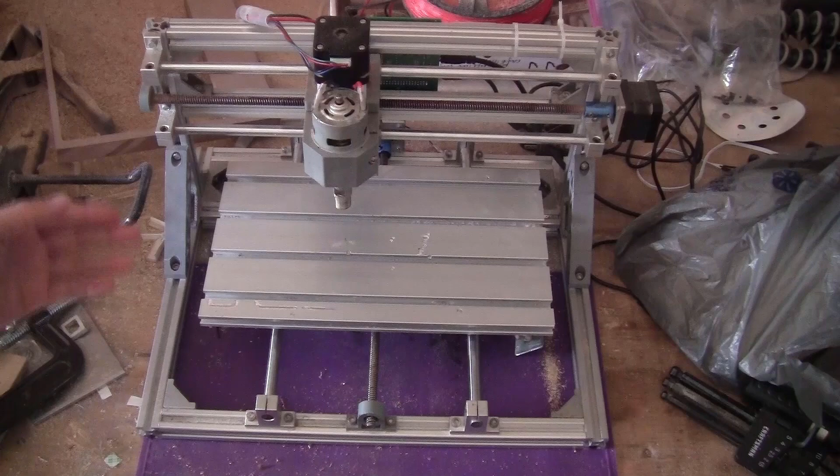Today I got a request from one of the viewers to make a video about the spoil board or waste board, whatever you call it, on this 3018 CNC machine, and I think that makes sense because look at what happened to me here.

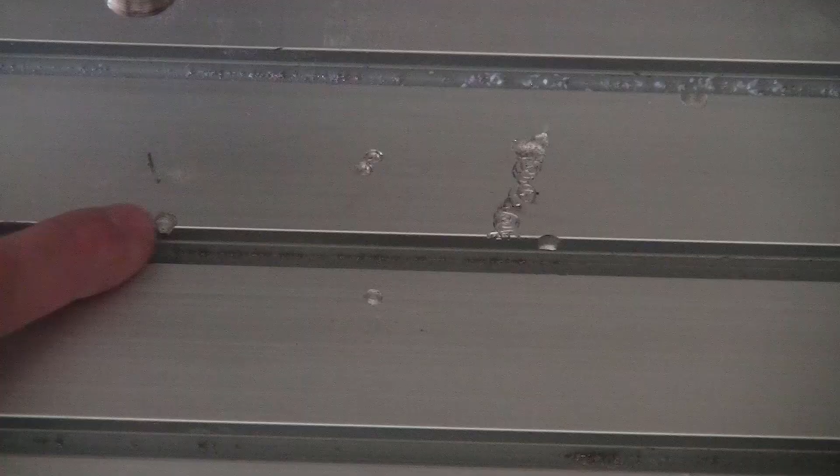From time to time, I have the bit go a bit too deep, and it cuts into the platform like this, and two bad things happen: it damages the platform, and it can also break your bit, so you definitely don't want this. So I think the request makes sense.

Okay guys, so first of all, you probably don't want to stack another board on top of this one, because you'll reduce the working range in the z-axis, and this machine is already very limited in z-axis range. So what I'm going to do is replace this platform with one I'm going to design and make, and I don't want to dismount the whole machine.

I only want to take this one out, unscrew all the bolts underneath, put the new one on, and then put a waste board on top of that. That waste board you can replace very easily every time you think there's too much damage on it. So let me show you the design I made on the computer.

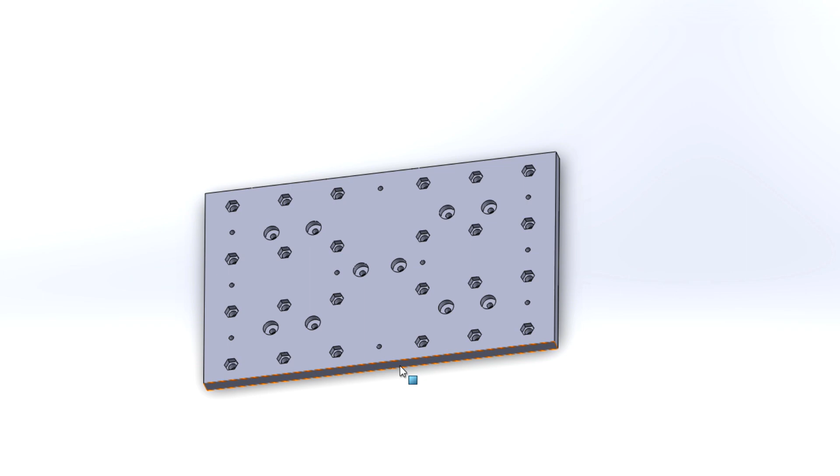Here's my design for the waste board. It has two parts, the bottom plate and the top plate. You can see the bottom plate is a lot more complicated, it has more holes and pockets that need to be machined.

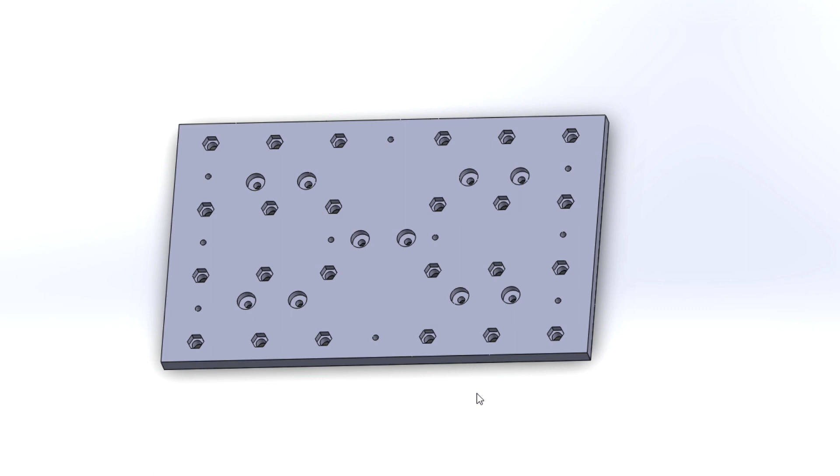The way I designed it, you can machine all this using just your 3018 CNC machine. Well, of course, you might need a saw to cut out this plate. So let me switch to Fusion 360 and show you quickly the CAM part for this one. The top plate is even easier, you just follow all the same steps, but there's less to do.

Okay, here in Fusion 360 you just click on File, open the step file I already saved, the bottom plate. Now click on Manufacture and create a stock for it. So I choose reference point, this one, and here I just put 0 and 0.

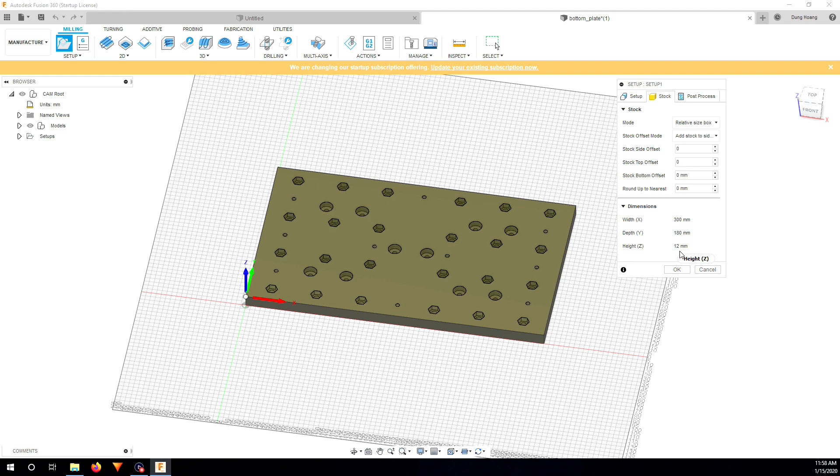Okay, so here you can see the dimension is exactly the dimension of the platform on your 3018 CNC, and the thickness here is 12 millimeters because I have plywood of half-inch thick, so it's about 12 millimeters. Now I just click OK.

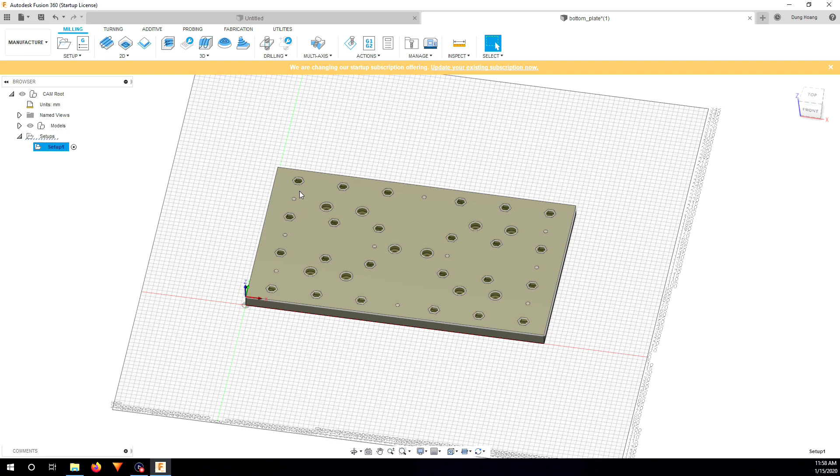For the milling part, I'm just going to use one bit, a 4mm flat end mill, because all the holes here are equal or bigger than 4mm. So first of all, I'm going to drill all the 4mm holes, which will be faster than milling. So click on drill and select, and I choose the 4mm flat end mill.

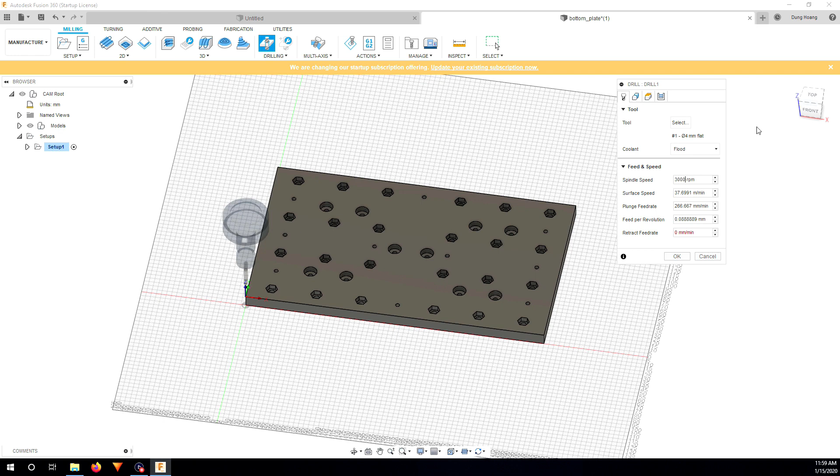Okay, here because it's drilling, I just go very slow, I don't need it to be fast. It's going to kind of burn the wood, so I'll put 3000 rpm, that should be fine. And for retract rate here, just increase it probably to 200.

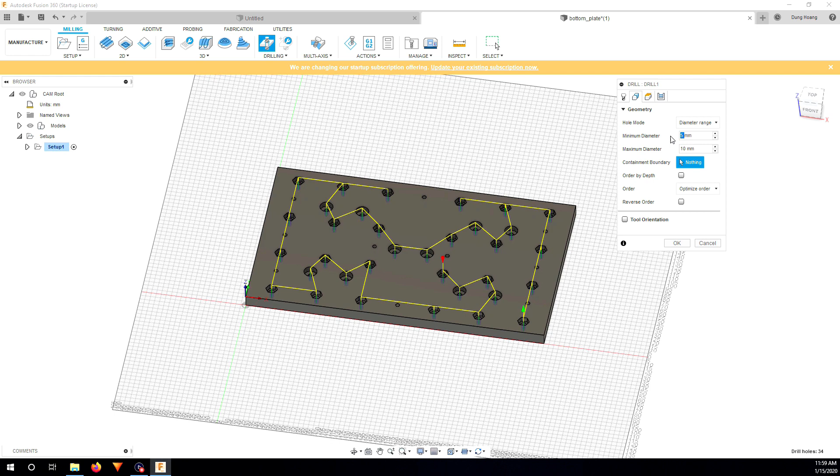Okay, disable this, and whatever hole you want to mill, I'm just going to choose the diameter range. So what I'm going to do is click here and put 3.5 and 4.5, so it only drills all the 4mm holes.

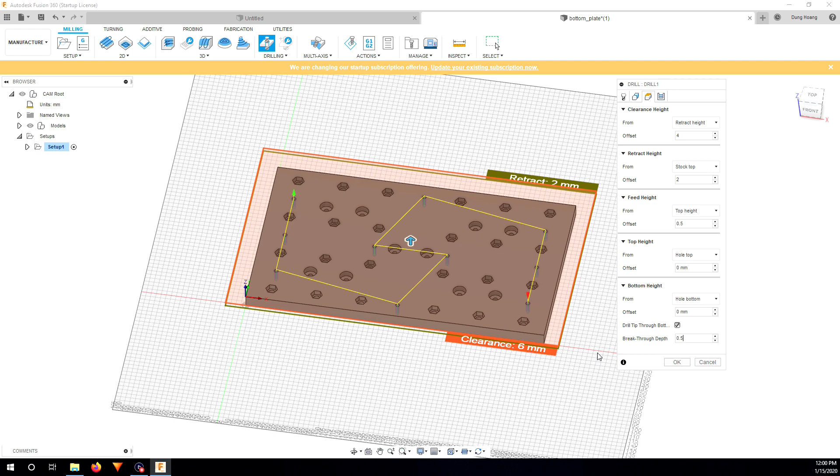It's going to ignore all the other bigger holes. And here I just have to reduce this to 2.5, and I'm going to drill through the bottom, the breakthrough depth I put at 0.5 millimeter, just to make sure it drills all the way through, then I click OK.

Okay, so now if you look at the bottom, you can see the tip of the bit goes through the stock, so that is what I want. Next step for the milling part, I'm going to do pocket clearing, so here I'm going to choose the same tool, and I'm going to go 10,000 RPM to make it cut a bit smoother.

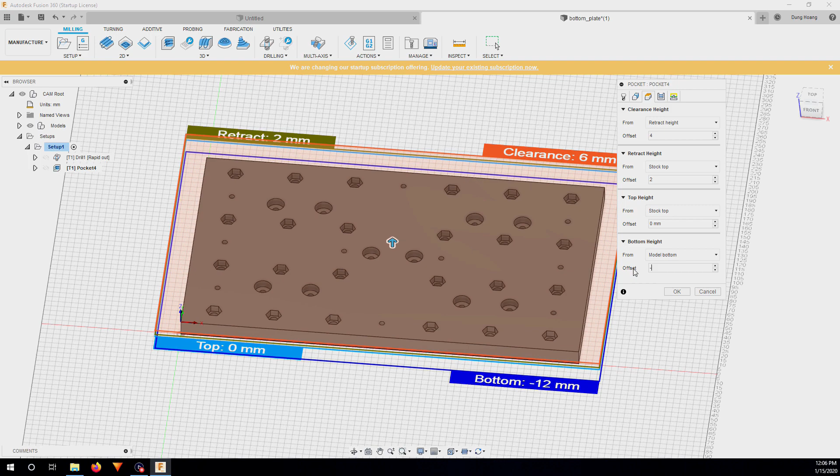Feed rate 800 I think is reasonable. Plunge rate I might just reduce it a little bit, probably 150. And disable this. Here I just leave it at bounding box. Well, that's it. Here I'm going to do 4, 2, and bottom height I put minus 0.5, so you make sure that you cut all the way through the bottom.

Here, make it a bit more precise. Stock to leave, nothing. And maximum roughing step down, I think 1 millimeter is reasonable. And well, shortest path. And here I'm going to put 5 degree, make it go a bit faster. And I click OK.

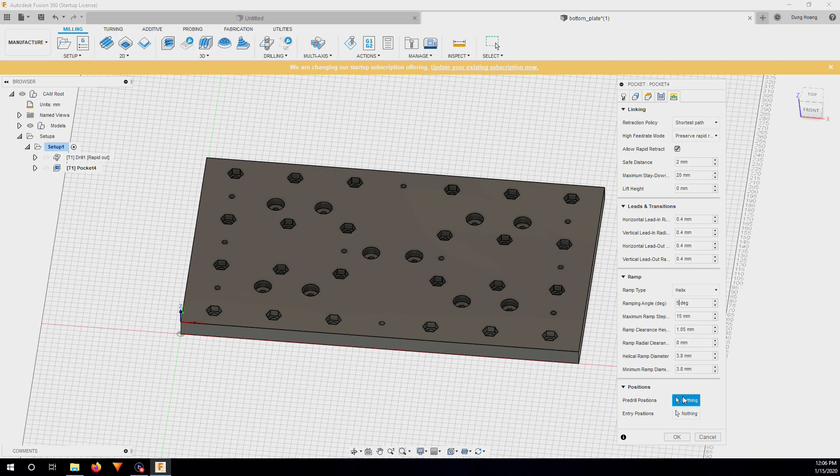Okay, so everything looks correct to me. So I'm just going to show you how the machine cuts this piece out and how I'm going to put them together.

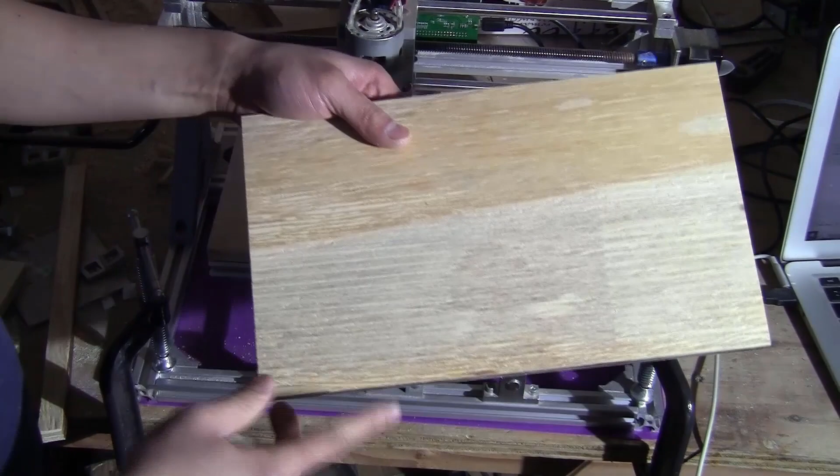Okay guys, so I just cut two pieces of 30 and 18 centimeter here. And I just mount one piece on here using the mounting tape that I have here. It's about 1 millimeter thick, so it should be enough for the bit not to bite into the platform. Yeah, I'm just going to mill the bottom plate first.

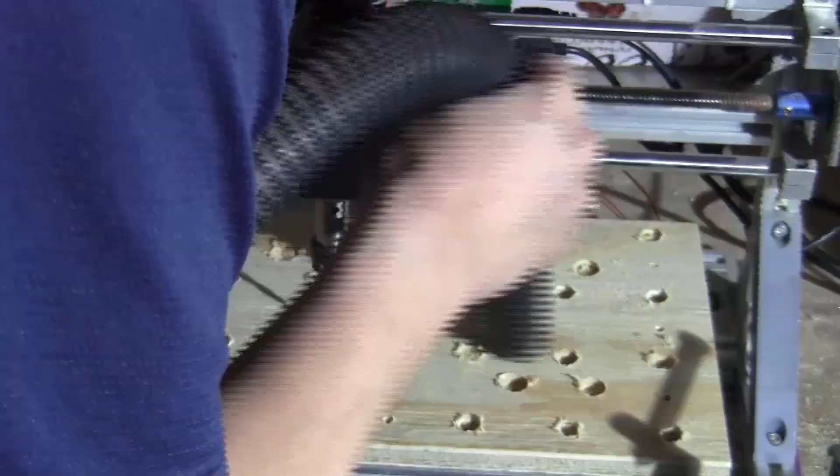Okay, so now I have the bottom plate done. I'm just going to do the same with the top plate.

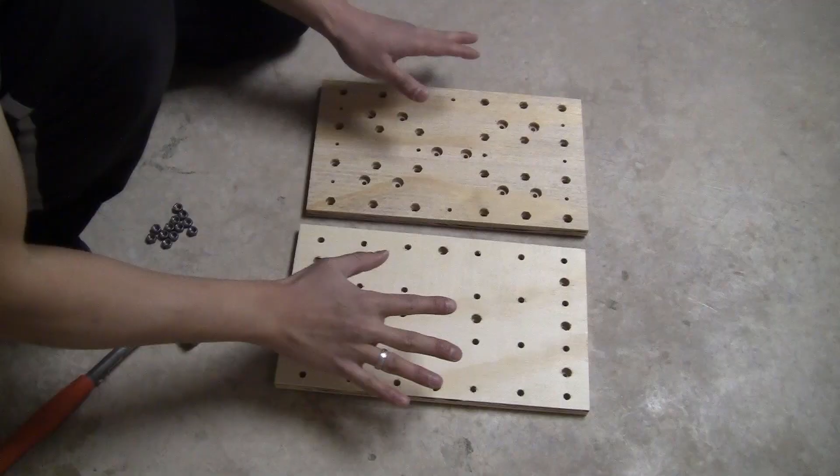Here I have the two boards that are already milled out after cleaning up. So this is the bottom and this is the top. Right now I just want to start working on the bottom part first. So just grab a bunch of M6 nuts here and pound them in those slots. I will tell you how to use them later, but right now just pound it in.

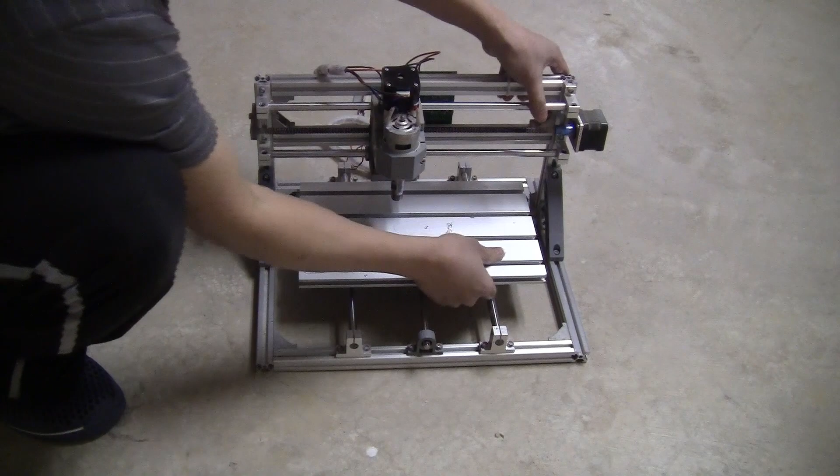Okay, so now I have all the nuts in here. Let's just install those two plates on the machine. Okay, so I have here the machine. I'm just going to flip it on the side like this, so I can see the bottom here. I'm just going to uninstall this platform.

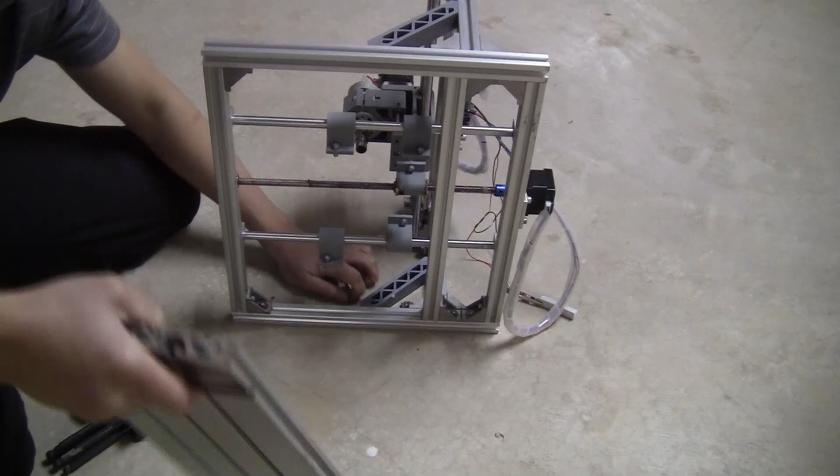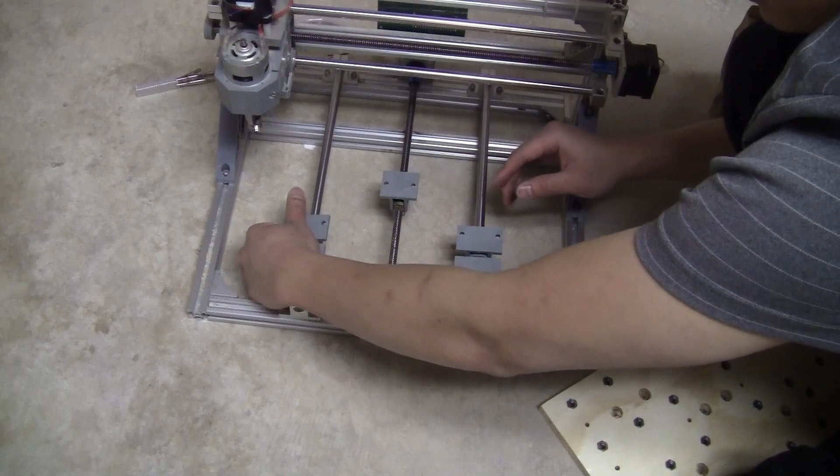Okay, so now you can keep this for later just in case you want to use this again, but I don't think so. Okay, so now to install this bottom plate on here, just make sure that you have everything here kind of face up. Because later on, if you have it face down like this and you have this installed, you're not going to be able to turn it this way. So turn everything upward and probably move this a bit forward.

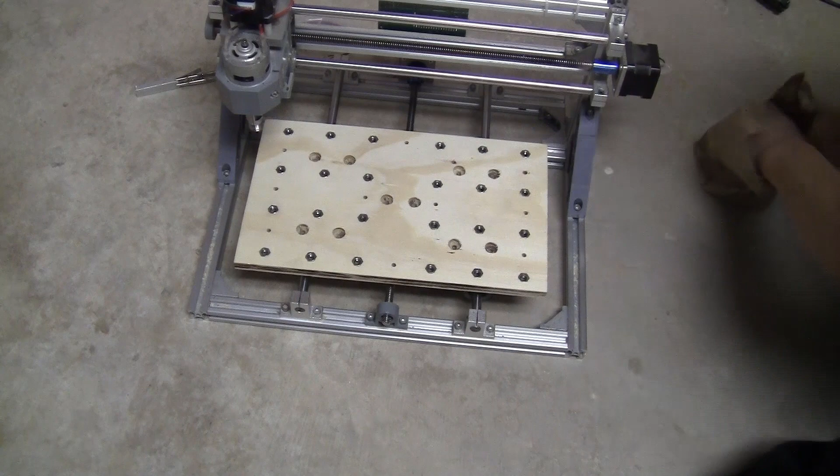Okay, and well, try to align this. First of all, you just install this one first, because this one you cannot really slide back and forth to align with the holes. These you can slide, so you can install them later. So just align with this one first. Okay, M5 bolt, 25mm length. Just slide through the hole here. And this hole, it should fit perfectly.

Okay. Now what you need to do is, you will have to loosen the bolt here and at the back. Okay, so now you can just slide them and find the holes for them to align and slide all the bolts through. Okay, and then just take some of the M5 nuts, put them underneath here and bolt it down.

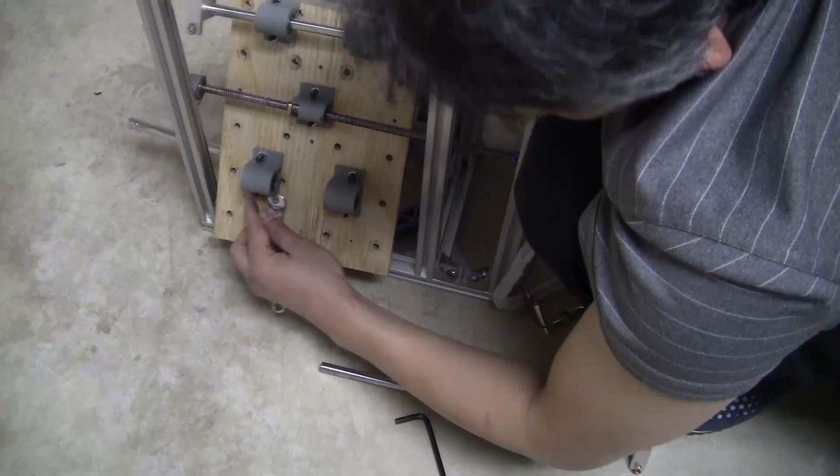Okay, so now you can tighten everything. Make sure that it moves smoothly in every direction. Now I have this board installed on the machine and it moves back and forth really smoothly, no problem. Next step, I'm going to install the top plate on this.

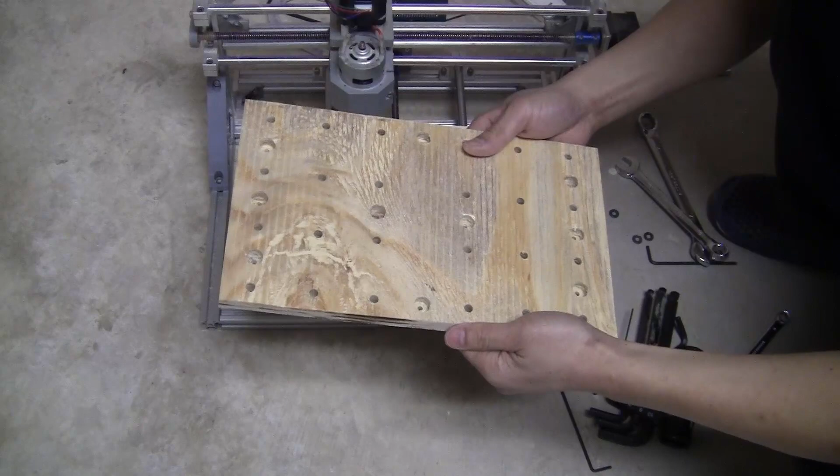But before actually fixing it to this, I want to trim the edge here a little bit, make it a bit smaller than 30 and 18 centimeter. Because later on, once I install this on the machine, I want to do a face trim, to make sure that this surface will be parallel to the movement of the z-axis. So let me just go and trim this off a little bit, not too much, probably half centimeter on each side will be fine.

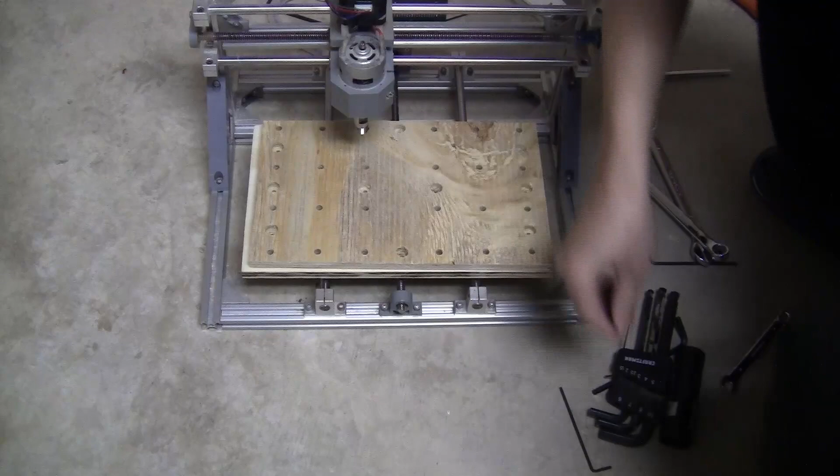Okay, so now I just cut a little bit on each edge, so it's a little bit smaller than the bottom part. So now I can fix this one on this one securely. My skill with the saw is not really good, so it's not really parallel, but that is fine. So I just use some of the 20mm M4 bolts to slide through the holes here in the pocket. They should line up perfectly, the hole on top and the bottom part. So just slide it through.

Okay, so now I just need to use some M4 nuts to bolt the two boards together. So I just flip it on the side, a little bit easier.

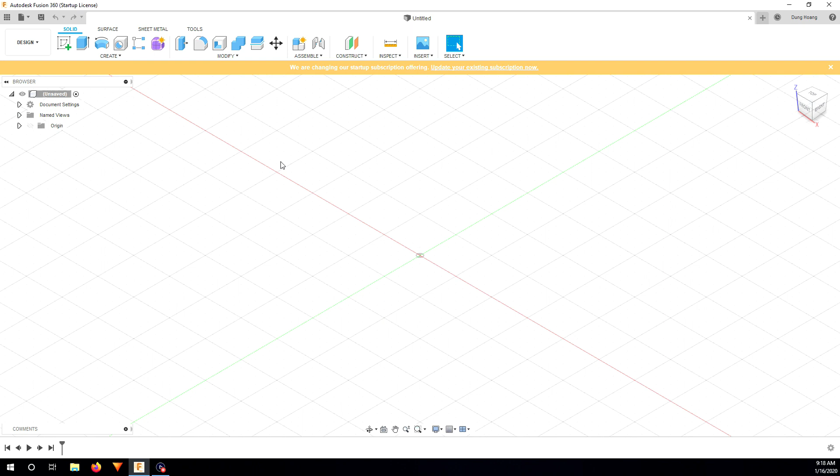Okay, so now I have these two boards fixed together. Next step, I'm just going to do the face mill of this. To trim up the surface of the board, I'm just going to do it the quick and dirty way in Fusion 360. First of all, I just click on create sketch and choose this plane.

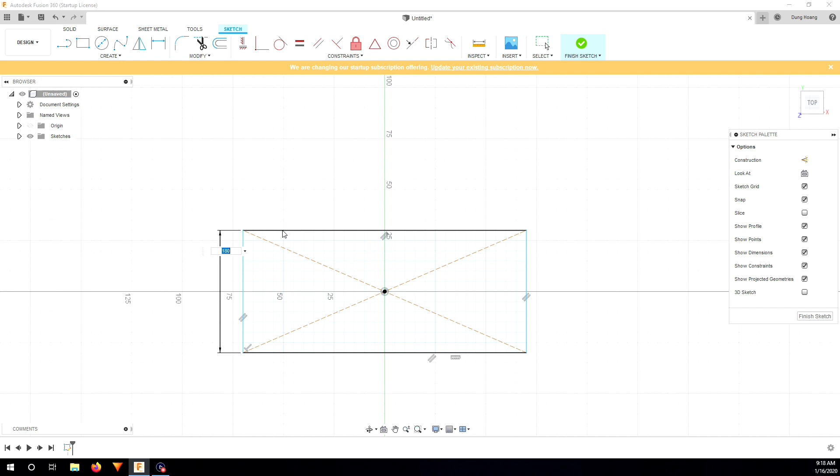And here I just draw a center rectangle. Dimension 180 and enter, and this one 300 and enter, click finish sketch and extrude. Well, just say 10mm, it doesn't really matter.

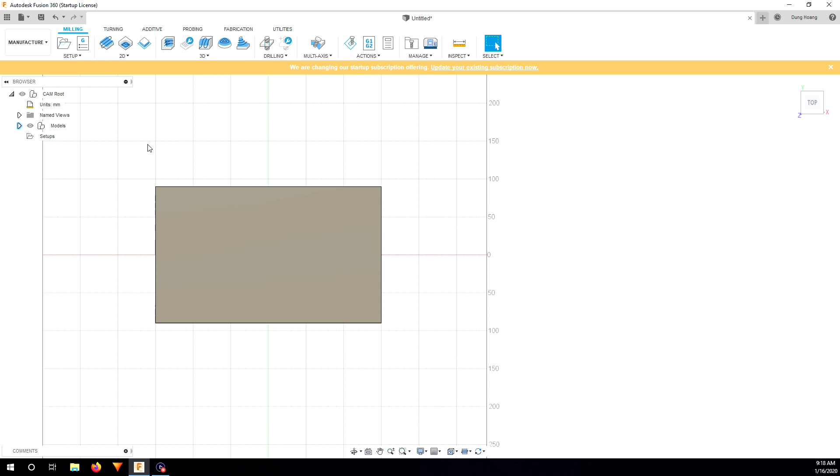So now I have the board ready. I just go to manufacture and create the setup. Here I always choose this corner, and here I put the side offset at 0, and here stock offset top on top. So it depends on how much you want to trim off each time.

For me, every layer, every time I'm going to trim off 0.5mm. If it doesn't trim off the whole board, I just run it again. So 0.5mm I think is reasonable. So I just click OK.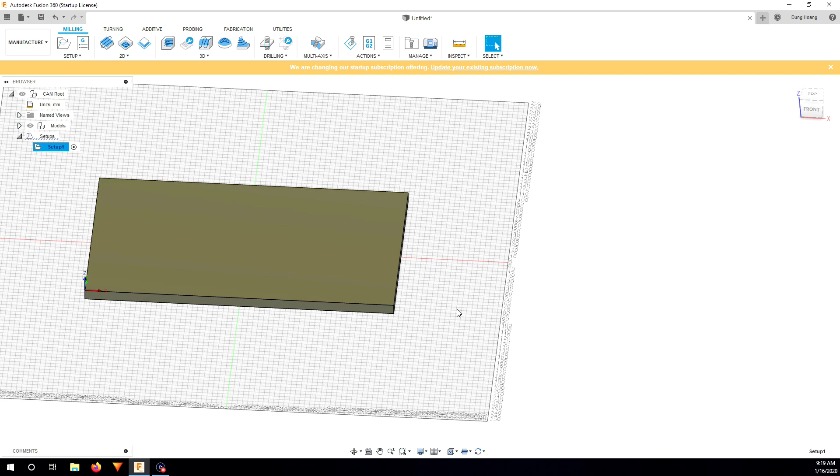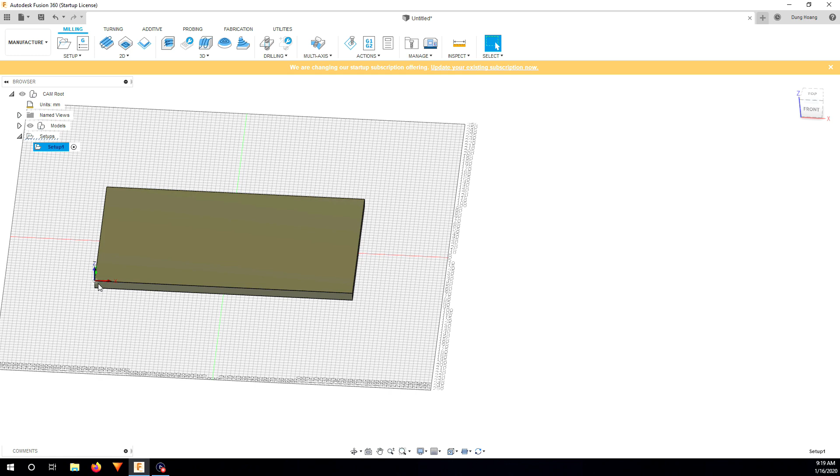Usually what people do is just face, 2D. The face is going to run over the board and trim off the surface. But because the board is exactly the working size of your machine, if you do that, it's going to run over the edge and might reach the limit of the machine. So I'm not going to do that.

What I'm going to do instead is 3D pocket clearing, and I choose the tool that I have - a 6mm flat end mill, so I'm just going to use that, and I'm going to go very slow.

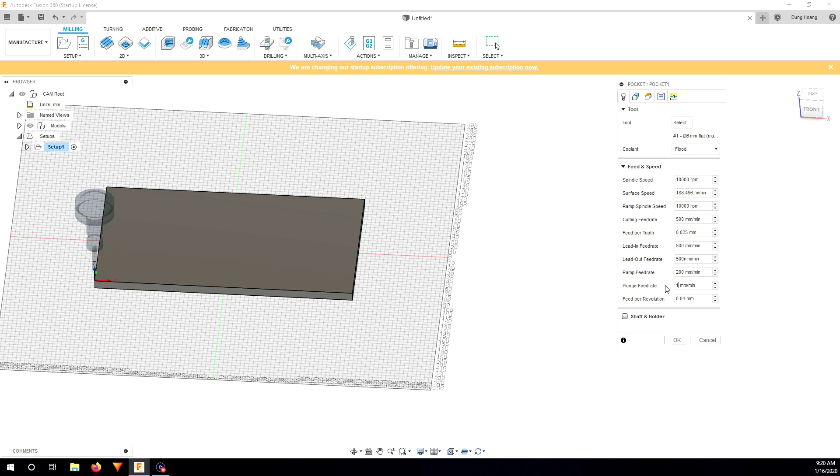So probably about 600mm, let's say 500, it would be fine. Just one surface, so it's not going to take too long. So this I will put 200 and 100 plunge rate. Disable this bounding box to center inside the boundary. Offset I'm going to put 0.5mm, so it goes a bit over the edge here.

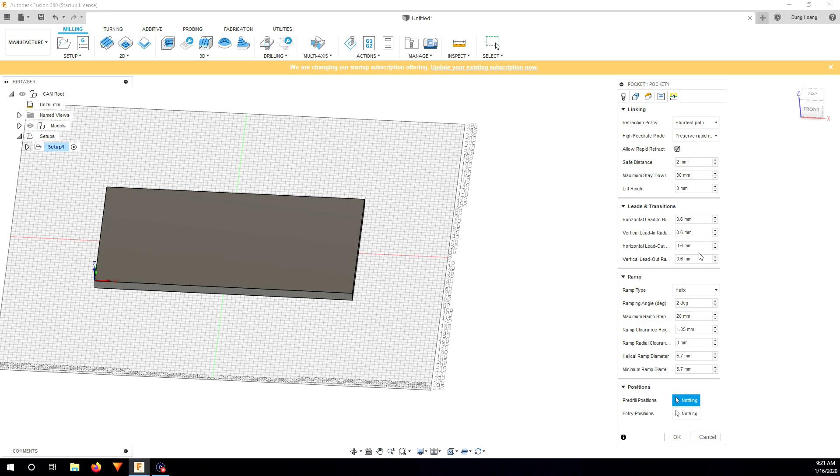Or maybe let's say 1mm. 2mm is fine, 0.2 millimeter. Okay, so here 4, 2, that's it, and here put stock to leave 0, and shortest path, that's it. I just click OK.

So now as you can see, the tool center is always inside the board, so it's not going to go over the edge, so it's going to be okay.

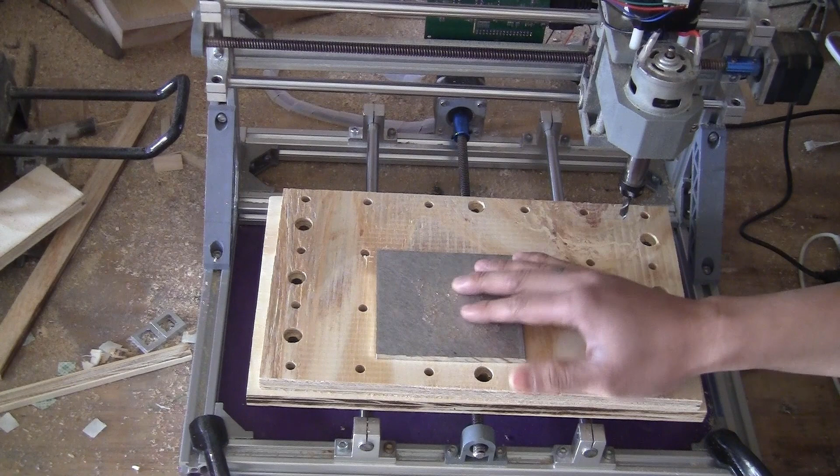It's from the original nut, just comes with the machine. So we just slide it in here, and you can tighten the bolt like this. So like this, and do it on this side, this side, and this side. So this is how I'm going to secure all my stock.

Just use the nuts that I put underneath. This is very useful and makes life a lot easier compared to the original nuts and bolts. And in the future, if you use this machine a lot and this spoil board gets damaged, you can just do another face trim to smoothen the surface again, or make some spare top boards and replace them every time they get damaged.

So I hope that you found this upgrade helpful, and it will release a bit more potential of this machine.